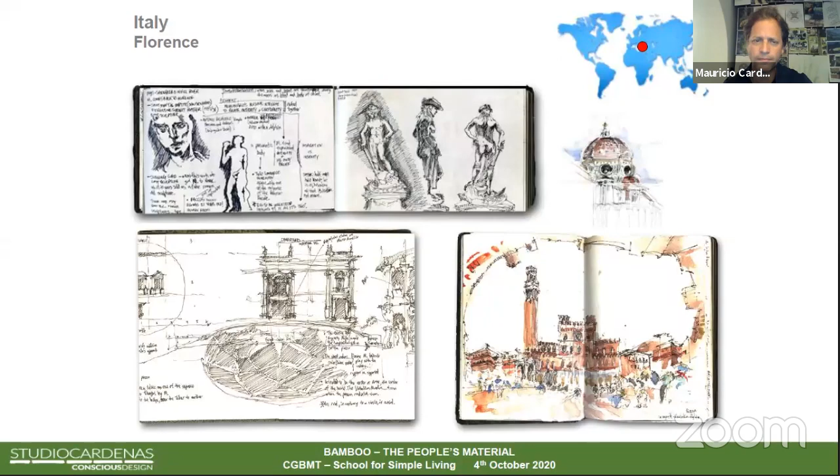Here we can see the study of the art of the Renaissance of Italy. During my studies, the geometry and aesthetics of Western culture, the origins of Western culture, also had a very strong impact. Then I came to Milan, which is the most pushing city in Italy, well known for fashion, design, and industries. And here is where I started my office.

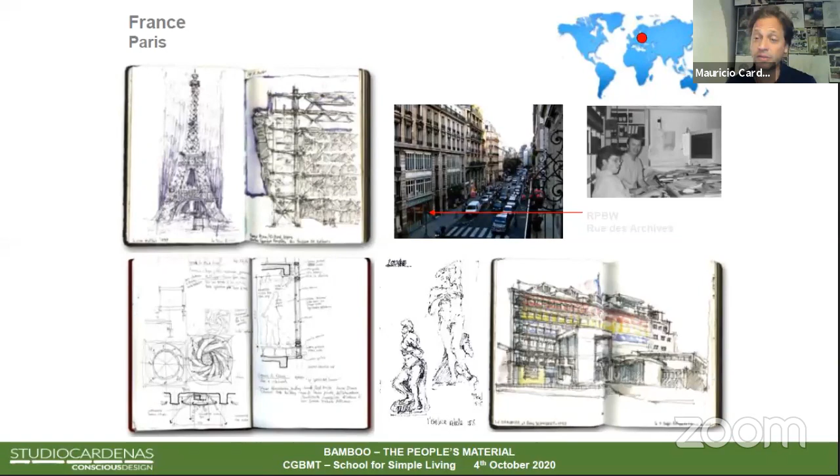But before that, I had the chance to work for an Italian architect, Renzo Piano, but in Paris. So I had the chance to have contact with a very important architect, and I understood very well the use of materials such as steel, glass, and building technologies that we see as very normal today, but that are having a very strong impact on the environment.

The massive use of concrete, steel, and glass are making our environment weaker day by day. So after these experiences, I was working in construction sites, doing management of construction sites and responsible for the design of facades of very big buildings like skyscrapers and office buildings, etc. I then came back to my origins.

I said, but we should go back to bamboo. I should go back to the origins of where I was born and where I lived, and to what I really believed in, and to the experiences from my opportunities of traveling both to Japan and China. And so I started my office, 15 years ago.

Since the first day, I was already working with bamboo. As you probably know, bamboo is a strategic natural resource, contributing directly to at least 6 of the Sustainable Development Goals adopted by the United Nations member states for the 2030 Agenda for Sustainable Development. And bamboo for construction - why is it important?

I call it a positive infesting because bamboo is a plant, not a tree, and it grows very fast - so fast that people usually get scared to have bamboo, as it passes from your garden to the neighbor's garden in a very short time. But this is a quality, not a defect. We just have to take care and understand how the plant grows, and can be cut, dried, and used.

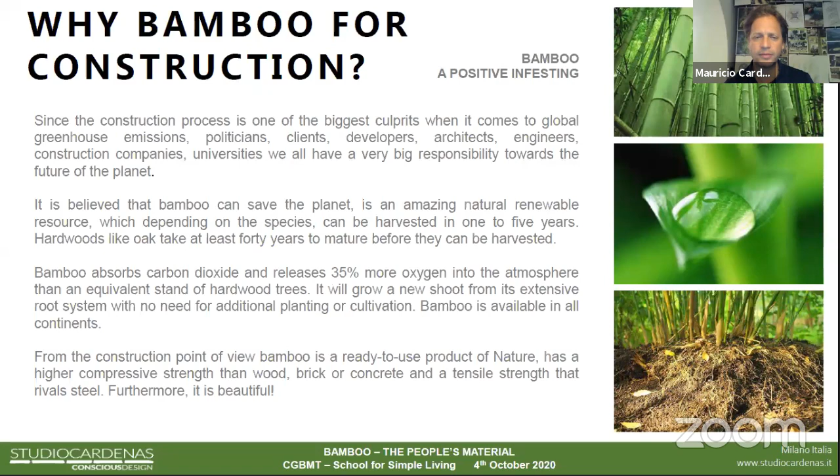When technology achieves sustainable engineered bamboo, I can start looking at that. But at the moment, I have actually refused some jobs because of that, because I really believe in what I'm saying.

So this is my office here in Milan, and we experiment, we do research - it's part of our job. Since the beginning, due to the use of bamboo, I've been recognized here in Italy and Europe as a pioneer of the use of bamboo.

The Italian government gave me the Italy Innovators Award for innovation in construction using bamboo. And last year, in the UK, I got the Build Architecture Award, as a sustainable company in Europe.

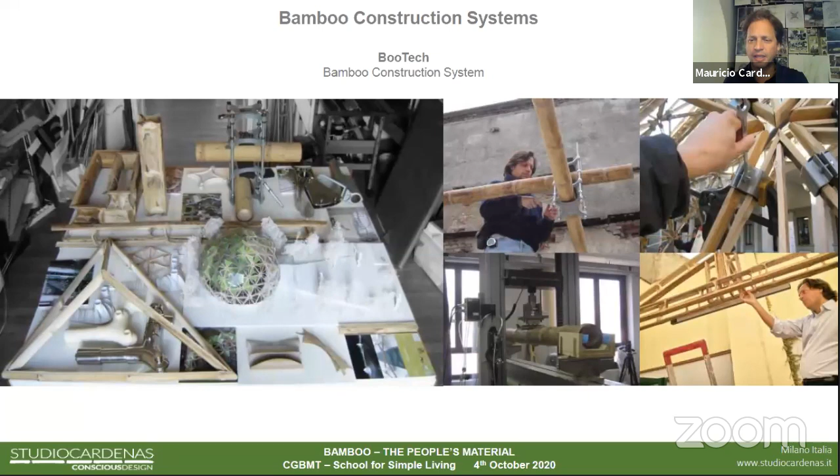Working with bamboo is very interesting, not only as the people's material, but also from an architecture point of view. Usually architects, in the offices I work as an architect and in other offices I know, work behind a computer screen, designing with software, and choose materials by looking at projects in magazines or catalogs. But bamboo is different. Bamboo makes us architects stand up, go out of the office, go to the forest and check out the material, because it's information we don't have in a catalog or that companies are selling. It's a natural material. It just grows freely, and its qualities are found directly in the forest.

Without even noticing, I became a bamboo culture communicator, in the sense that I'm invited as a jury member, or for teaching or giving lectures, as we're doing now. Last year and this year I'm Italian Design Ambassador, and I'm communicating bamboo. I'm the only Italian architect communicating about bamboo.

I've also had the chance to write articles about bamboo in Italy since 2005. The first article about bamboo as a construction material written in Italy was, of course, written by me, for the most important construction magazine in Italy, and it even became the front page. I wrote the first bamboo construction manual in Italian, and was invited to write the preface of a book written in seven languages about bamboo architecture and design. And in China, invited by INBAR, I wrote an article about bamboo.

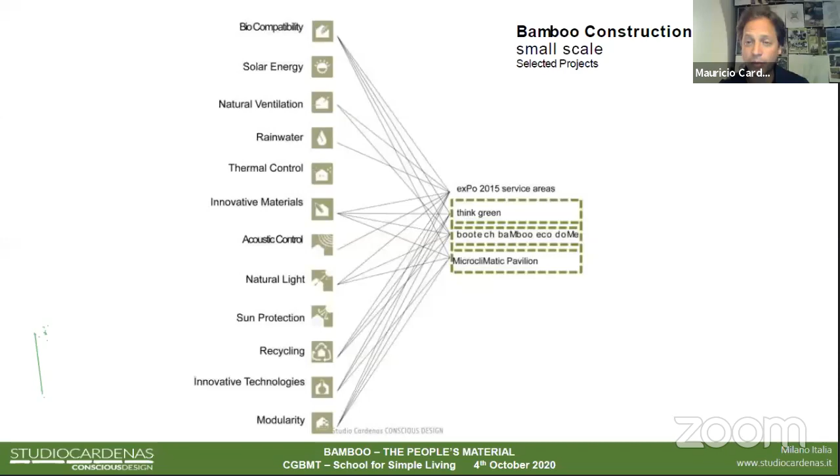So now let's go to the projects, and I'll try to go quite fast so I don't surpass the time we have. I'll start with small scale bamboo constructions. I chose some of them - I didn't include all of them, of course - and I decided to show only built ones, to understand the reality of the potential of using bamboo. Coming from Colombia, I always admired, and still admire - he's my friend nowadays - Simon Velez, architect.

Pioneers used mortar inside the bamboo, perforating it to include metallic bolts in order to make connections. That's how bamboo is built all over the world. But for that you need specialized manpower, which we don't have in Italy, or it's very expensive. So having experience in the facade industry, working for Renzo Piano and as leader of Arup's facade engineering, I decided to design a system that can be used and built by any company in Europe and around the world.

This is the system for which the Italian government gave me a prize. It's very simple, it works just by pressure. And this was the first structure.

I brought bamboo from Colombia, the maximum quality in the pictures. I worked with two of the top bamboo experts in Colombia, Marcelo Villegas and Germán. I showed them the project and my idea, and they liked it so much that they gave me the bamboo as a gift, shipping 100 bamboo poles because they thought the direction I was pushing was very interesting. That was my first project.

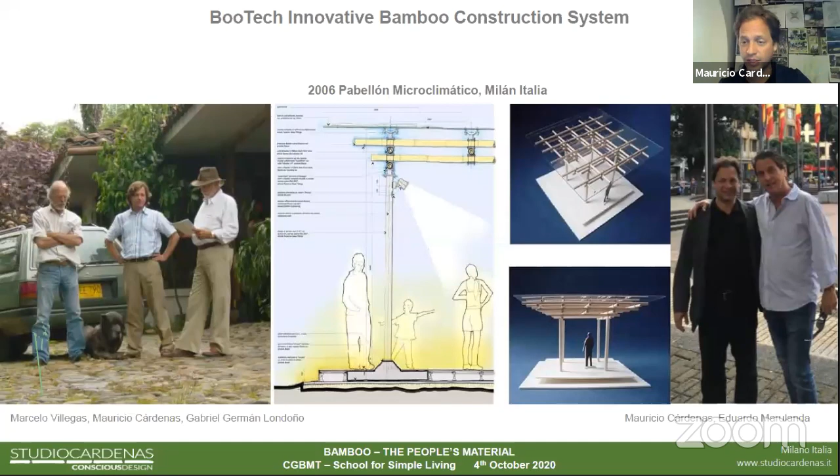It was with no client. The client was myself, just talking with these people and they gave me support. The students and people working in my office at the time were the builders. We all got away from our computers and got our hands dirty. We cleaned the bamboo, prepared all the joints and steel work, and we constructed it. And this is the result.

It was very well accepted in Italy, Milan especially being keen on contemporary design and fashion, and this was embraced as contemporary architecture. We're talking about 15 years ago.

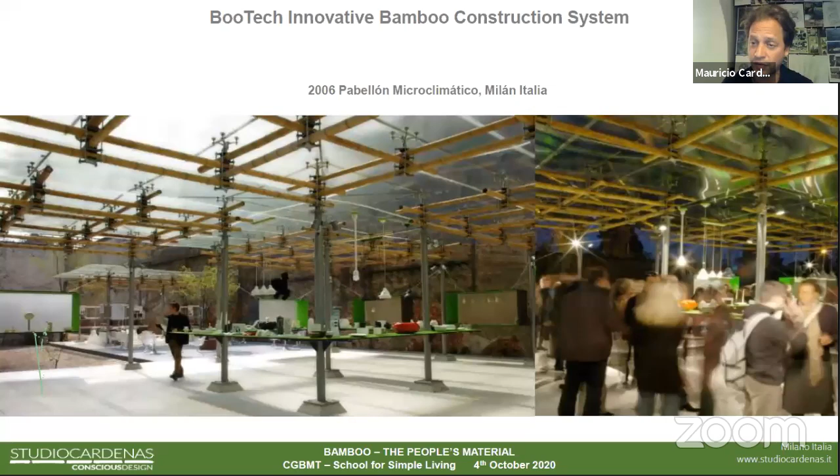This pavilion remained at the site for three and a half years. It was supposed to last just for Milano Design Week, a month at most. But the Milano city government asked me to leave it there for public use, and I was very happy for it. Three and a half years later, they told me they were going to refurbish and restore the whole area, so I had to take it away, and I did.

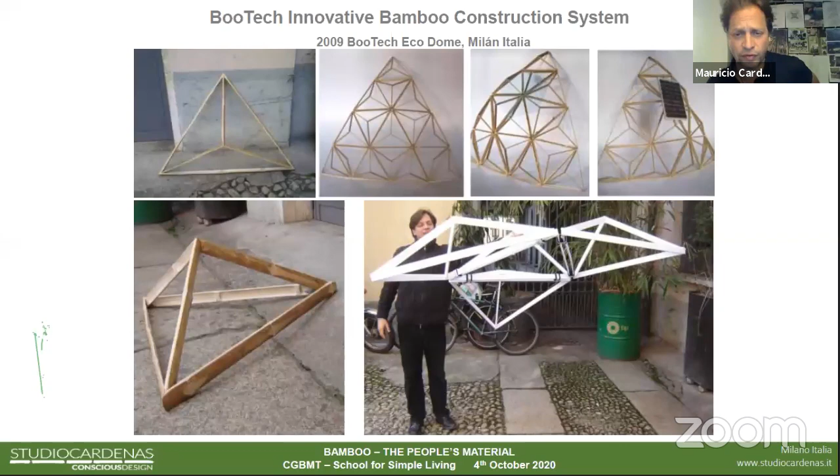I used the bamboo in a different way, cutting the poles to make this geodesic cupola. These are the ideas for the joints, and these are the models we did in the office to understand the complexity of this amazing and beautiful geometry. The geometry is amazing - you can see in the picture I'm just holding some cardboard pyramids, and the geometry itself behaves very well from a structural point of view. Then when we put bamboo in, it becomes a hundred times better. That's how we did it.

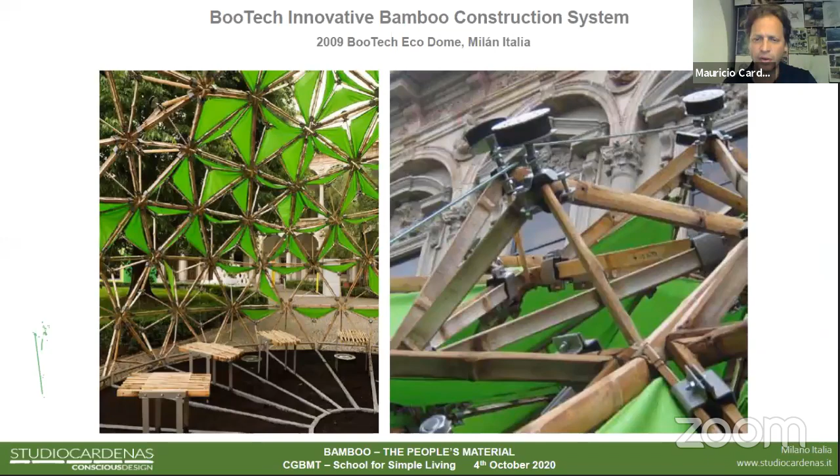We could even put the joints not at the intersection, but move them 20 centimeters away, and it still worked great. All of these are experiments, contemporary architecture, but also experimenting. It was placed inside a Renaissance courtyard, so the geometry follows the Renaissance geometries, and geodesic is a golden ratio in 3D. It's very interesting, the connection between both.

Then we dismounted it and took it to Venice, to the Venice Biennale. It was there for the whole Biennale. We're talking about 2009, 2010 now.

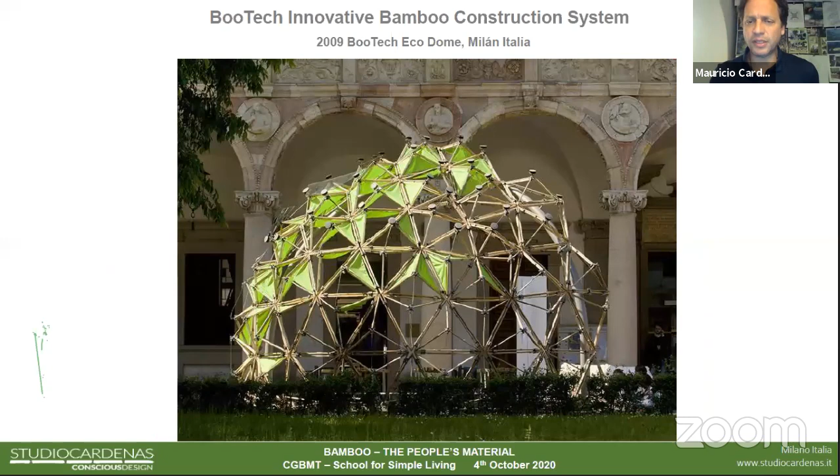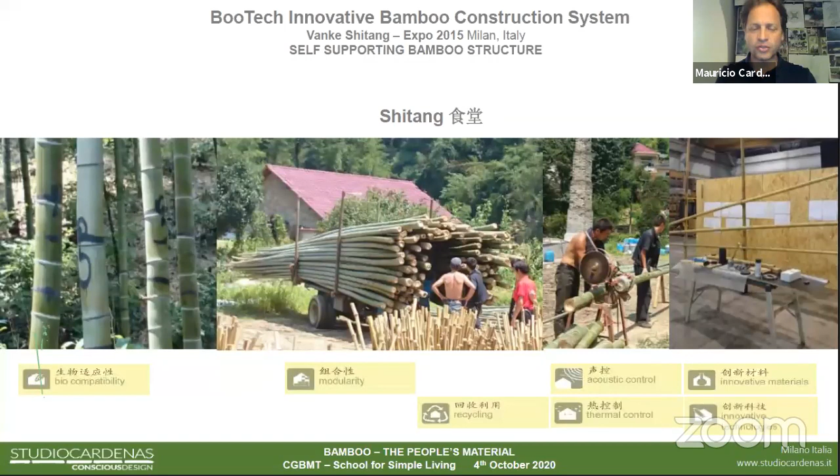Anyway, I went to China. The client was very eager to use Chinese bamboo, so I went to Anji, where the big bamboo forests are, and I was choosing the bamboo, controlling and checking its quality before bringing it to Italy. This was also important because bringing bamboo to Italy, especially for Expo, had very high standard requirements.

And then we did the prototype. These are the connections - it's the only bearing structure of the Expo, because some pavilions, like the Vietnam pavilion, could not pass the Expo's tests and had to use metallic structures covered with bamboo.

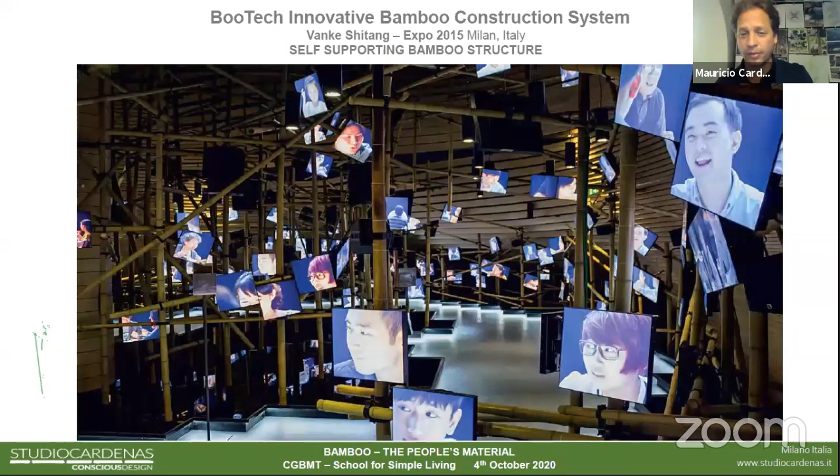In this case, it's purely bamboo, round pole bamboo structure, and people walk through. So it was very interesting and a great achievement.

The next two projects are in China, medium-sized projects. We were invited, 10 architects who work with bamboo, to do this experimental neighborhood in Baoxi, in Zhejiang province. My pronunciation must be very bad, but anyways, that's the name of the place.

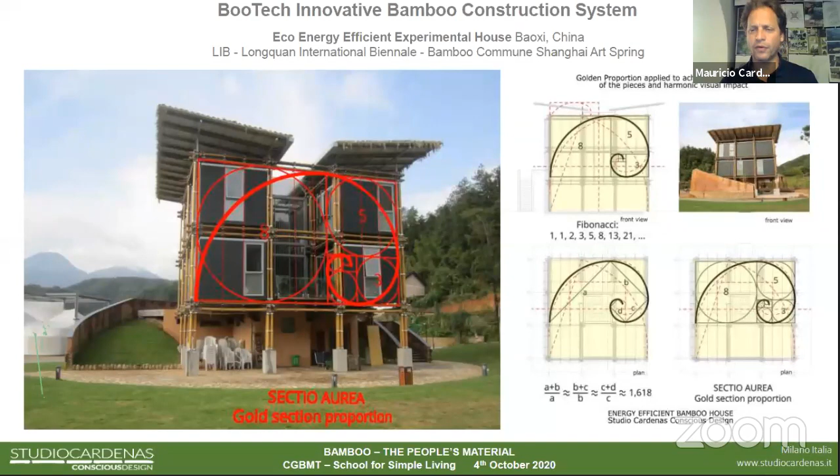The proportions are also what we call aurea, or golden proportions, but they're nicely connected to the Vastu Shastra in India as well. So, probably these geometries have a similar origin in the past and just developed in different ways. The ancients understood very well the potential of geometry, not only for beauty but also for engineering behavior.

You can see this is the idea of bamboo as a contemporary material. It doesn't have to be expensive. It just has to be contemporary and hopefully futuristic.

This comes back to what I was telling you, that I was very impressed when I saw Chinese and Japanese constructions made for the emperors with natural material, constructions that last until today, more than 600, 800 years old. Some of them replace the material, the same as we do with our cars today, the same as we do with our phones and with our technology today. We change the parts.

In Europe we make buildings that will last for hundreds of years, but using natural material means we have to change the material, and it will not be natural anymore. So for keeping the natural material truly natural while using it in a contemporary way, my approach is to use it as if it were a technological device. So in this house, every time you need to replace an element, you can just replace it because it's dry mounted.

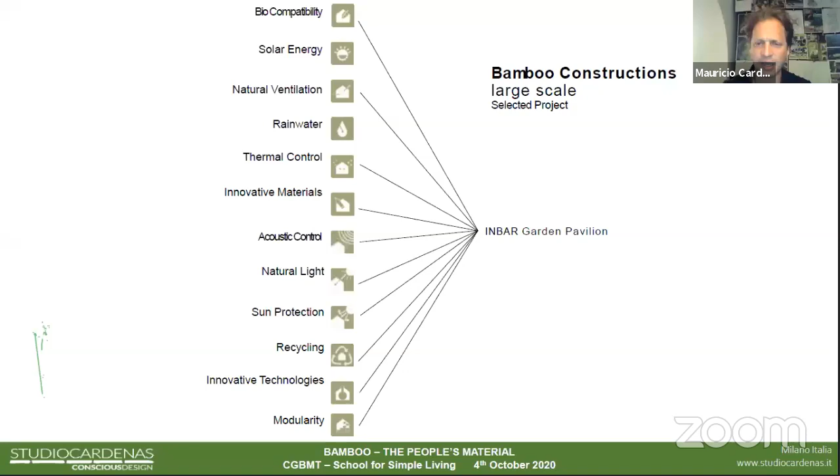Now the last project, and I'll go fast since I think we're close to the end of the 20 minutes, is the Inbar Garden Pavilion, International Organization for Bamboo and Rattan, as I hope everybody knows about it. It's based in Beijing, and Liu Wei will talk about it in detail. It's the largest bamboo structure in northern China, a 32-meter span, as you can see.

In all of the projects I've been showing, I haven't gone into detail about the conscious design, but you can see it at the bottom: acoustic control, thermal control, recycling, modularity. All of these elements are part of the design of this contemporary bamboo architecture.

The concept comes from the idea of not doing the classical pavilion and garden separately, but making the garden and the pavilion become one. So it's landscape, engineering, and architecture fused into one.

I got inspired by this Argentinian-Italian artist who innovated art by, instead of painting on the canvas, cutting it. By cutting it, he made such a beautiful and strong statement. So I did cuts on the garden, to bring in natural light, and used earth to do acoustic control, and used the plants.

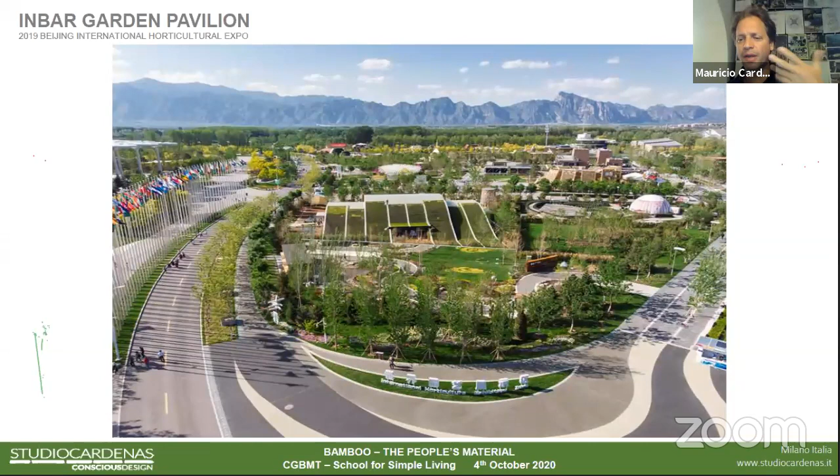You can see the other pavilions in the expo are pavilions on the soil, on the garden. This pavilion was recovered with the same soil that we took away for building it, giving back to earth what we had taken from it and using it for planting.

This is the concept. I don't know, sometimes you get some yellow lines, some drawings on top. I don't know if it's me doing it or what's happening, but anyways, it looks nice.

You can see here, from the concept to the construction: the inspiration, the models, the rendering, and the construction.

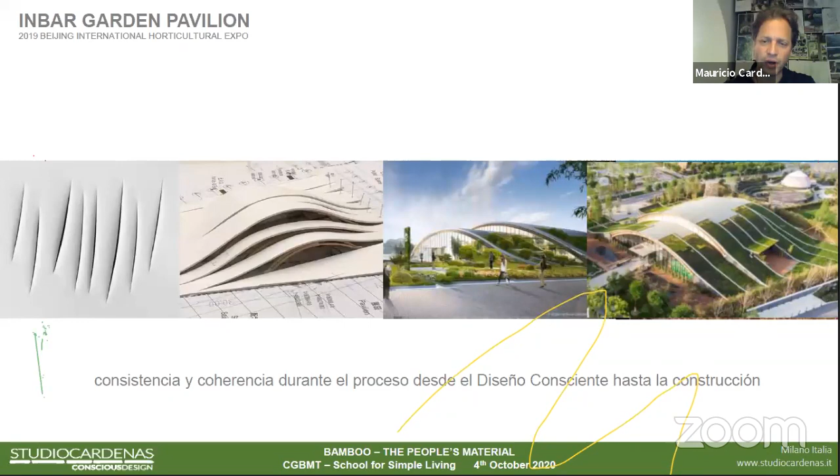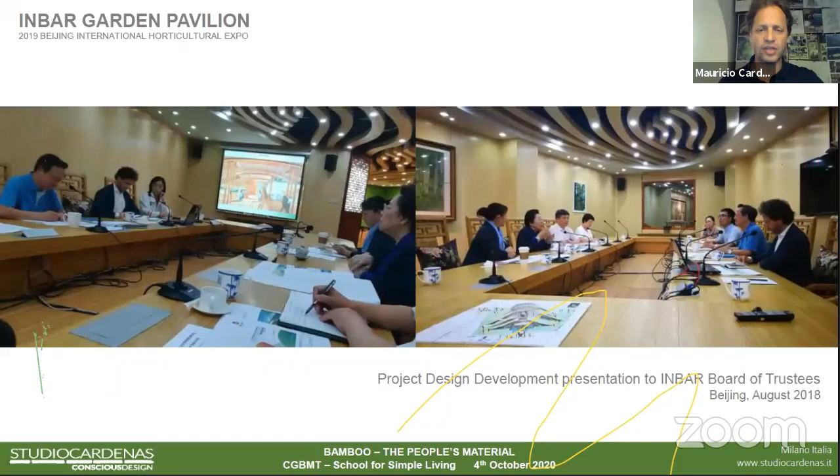Sketches, my sketches for studying the project, modeling, and the model I brought to Beijing, and it's now still in Beijing, used for meetings to explain the idea behind it and receive comments and suggestions. Bringing it also to the construction site was very useful to understand what we were going to do.

Choosing the plants was a collaboration between an Italian expert in botanics and a Chinese gardener, and we chose the plants for the garden. So the garden is a bamboo garden, and the building is a bamboo construction.

It was also called the geometry, you can see the geometry is based on this — the original curve of the arches is based on this geometry and the Fibonacci sequence geometry. It's very interesting because this was the maximum bend we could do to the bamboo. It's a mystery, whether it was a coincidence or the geometry has a real response from nature.

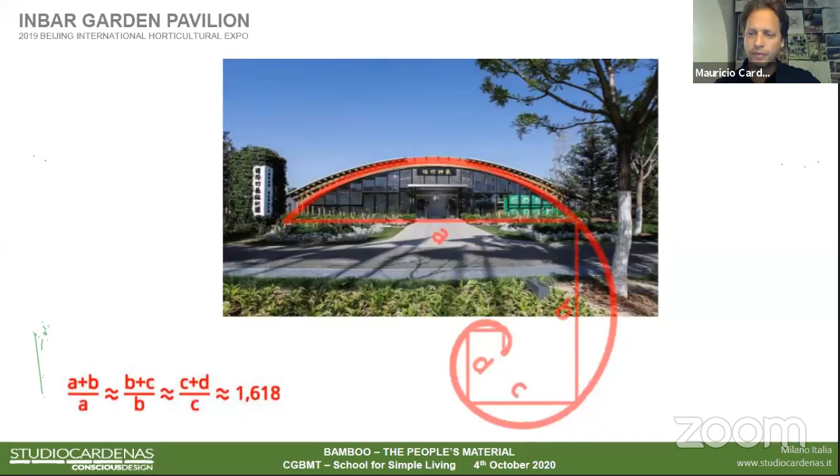I made a mistake and left the information here in Spanish, but I will read it for you in English. The Inbar Garden Pavilion has 54 meters of span and 40 meters of depth. Each arch has 32 meters span and 9 meters of height.

Dividing the arches into sections and opening them at the base made the structure look very essential and light. We used more than 5,000 bamboo poles, Phyllostachys pubescens, a Chinese original species.

The diameters range from 8 to 10 centimeters, and the age is from 4 to 6 years old. The principal arches are curved by heating the bamboo poles, and the process of transforming the bamboo into yellow was also done through the fire process, which was analyzed to give the bamboo a 30-year lifespan.

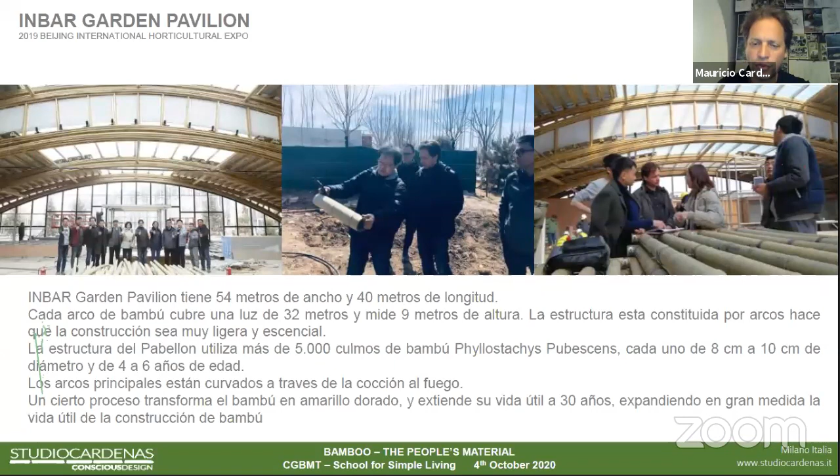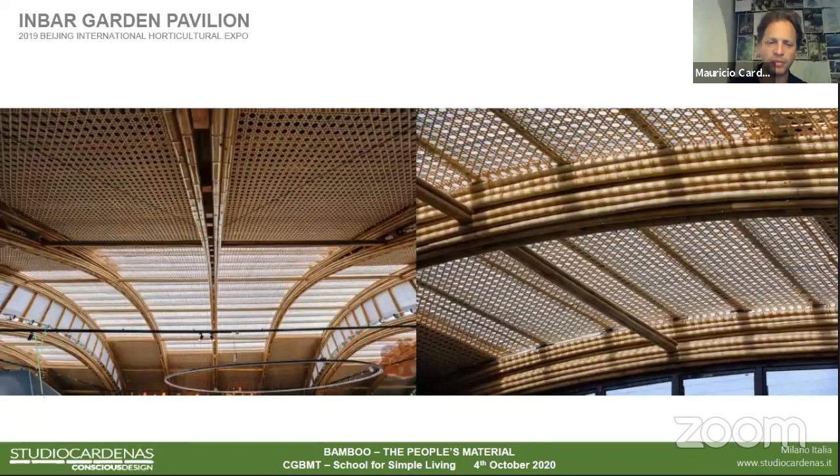Here are some aerial pictures, interior pictures of the bamboo structure. The exhibitions were amazing, six months of great exhibitions. You can see the connection between the glass facade and the bamboo structure, as contemporary as possible.

Because of the reflection of the water, the public named the pavilion the Bamboo Eye Pavilion, and I really like that image — that name is very nice. You can also see the green roof.

The opening day was a world event, an international event, and during the expo Inbar organized amazing meetings and cultural exchange events. The pavilion received the grand award in the category of international outdoor garden, in recognition of innovative and ecological design and execution.

What I was telling you — next year we'll have the largest bamboo maze in the world, the Labyrinth. In October we're going to do an event called Under the Bamboo Tree, and I'll keep you updated on that. I'm doing a small but very interesting research structure to present there, and there will be some lectures and conferences that I will let you all know about.

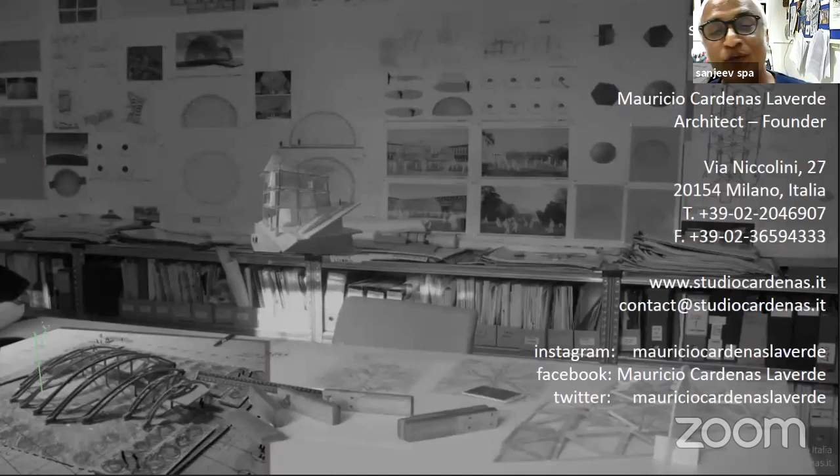Thank you, Mauricio. Thank you. This was a wonderful presentation, and it addressed the misconception that bamboo as a material is only for the poor — but with design elements it can be contemporized. It's a wonderful presentation. I would now request Neelam for her presentation.

Neelam, I know Neelam from the past 35 years, and she has been working in bamboo. Her firm, Manasaram Architects, has done wonderful projects in bamboo. Neelam, I would like to ask you how your journey started — you've been using bamboo for a long time, how easy or difficult it is to execute bamboo-based buildings, and its acceptance among people. Could you also tell us about your engagement with various kinds of people — students, professionals, policymakers, and communities? Your CGBMT is also running some courses on bamboo appreciation technology.

People would like to know the pedagogical approach for young professionals who want to use bamboo as a material. And what do you think about bamboo as a material of the future in the construction industry? So how can bamboo be brought into mainstream communities? Because bamboo as a material is coming to urban communities through various means, and architects are using bamboo. But how can the same architects and designers take bamboo in a much more revised and refined way with design elements, keeping in mind the cultural significance of the structures to the communities? I think this will be very helpful for our listeners.

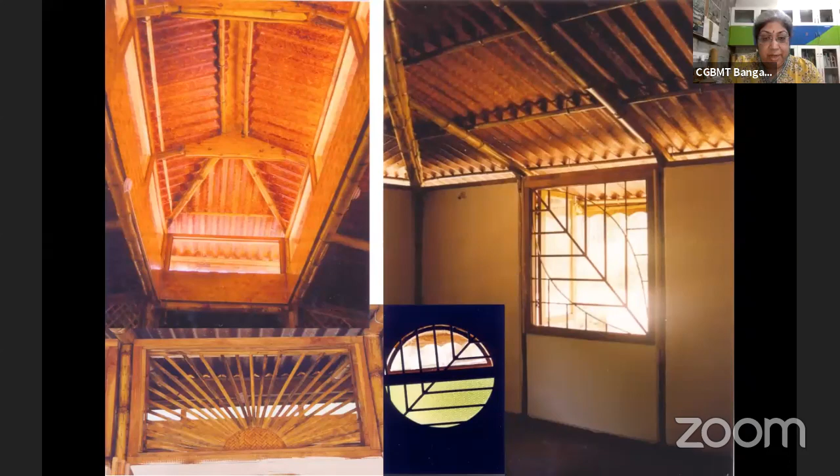This 2-bedroom house was presented in such a way that people should associate themselves with it, that even in urban areas we can build houses of this type and actually live in them. This is the interior of the house, finished in 2002. Most of the training programs for early architects and builders actually happened under this project, which was part of TRADA, DFID, BMTPC, Rajiv Gandhi Rural Housing Corporation, and the Plywood Institute. This is what came out of that particular project.

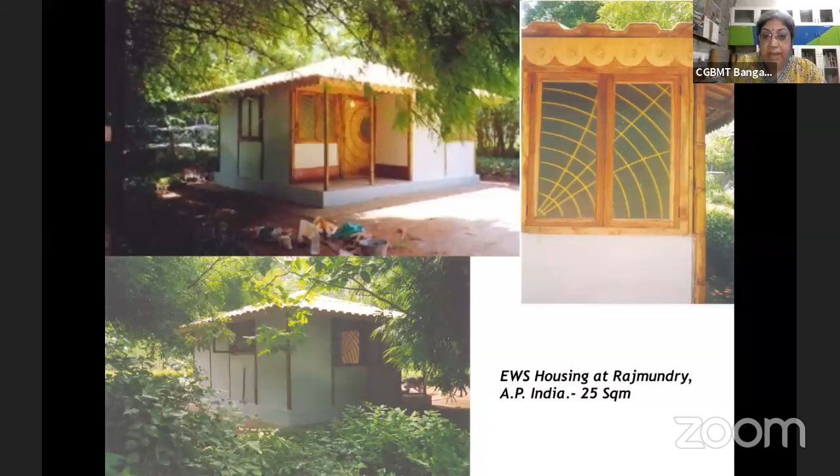This is another project we did, a very small housing project in a village in the forest, for housing for the poor - EWS, economically weaker section housing. This was an example we put up, as they had asked us to show the villagers how to build with bamboo again. This was also around 2005.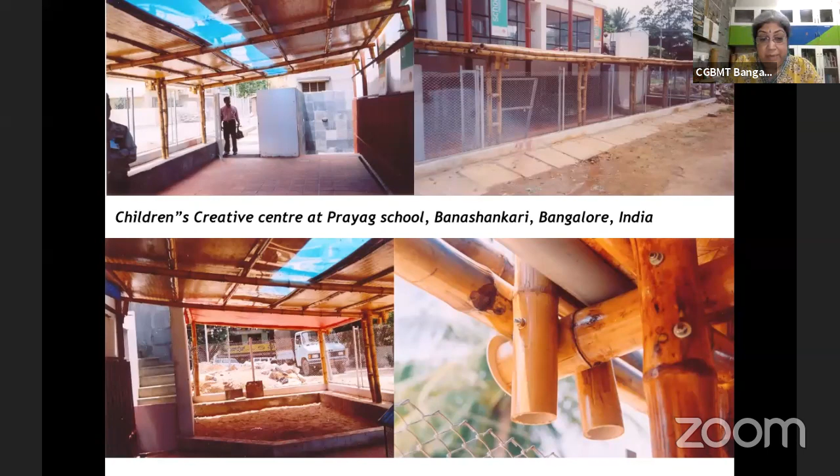And on the other side, this was bamboo, which I was working with, where I had these materials which I was experimenting with. So this is the same client, Prashant Prakash. These are in Bangalore, which is called the Discovery Village, and this was in 2007. We did a lot of furniture also for them, about 15 sets of furniture.

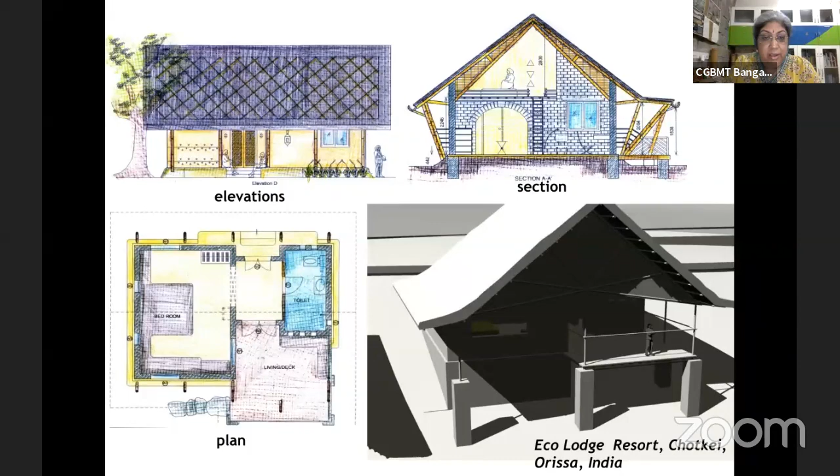This is a project which again Bansal sir had given me in Orissa, but somehow we could not go for the construction of this, which I have not got photographs of. There are several projects like that, because the budgets always used to be so small that they could not afford the other part of the expenses. So I have been giving them designs, but I have not got construction done.

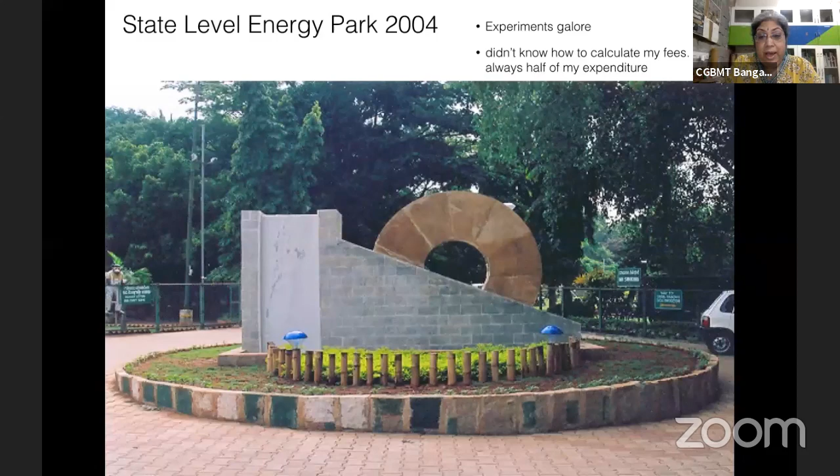We were given, I was an architect for the state level energy park, and I said bamboo is the lowest low-energy material, why not use it as much as possible? So there was a lot of debris, and I had stone and bamboo, so I experimented with as many types of construction systems as I could, which I have been trying to show.

This was one thing I always had in mind, that whenever I went to a client and tried to tell them to use bamboo, they would say 'can you show me where it has been done?' And I would not have many examples. So I thought I will keep changing my construction system to have as many systems as possible. So in every project, my construction systems actually change, except for some basic things—everything changes about how you actually take the load.

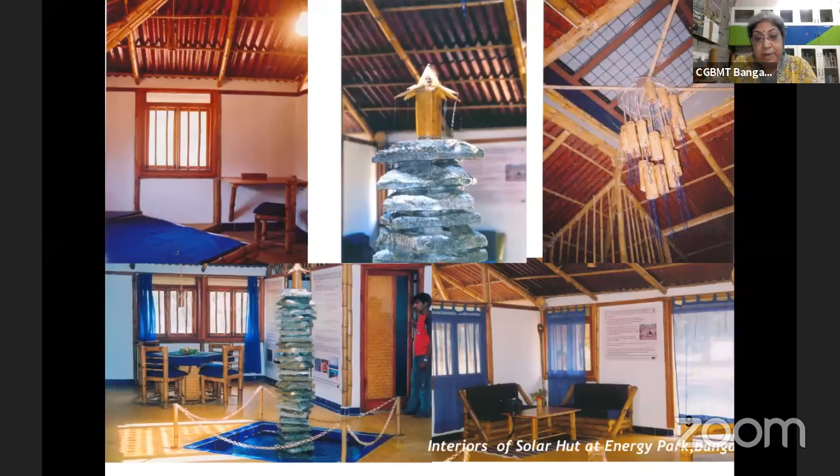And this is the interior with all the furniture in bamboo, as you can see, including the chandelier that is there—that is also in bamboo. I had 4 or 5 pavilions which I had to build, and I thought, okay, let me do all 4 or 5 differently, so that I can experiment with 5 types of systems. And that's how it kept on going.

Then this is another one in 2006, which is a bridge that we did for the Yamuna Biodiversity Park, and you can see the biodiversity condition—it is still there. This is 50 feet, 15 meters long, and we have hardly got any maintenance done for all these years. So this is a recent photograph put by Delhi Development Authority with the Biodiversity Foundation, which was on the cover of their magazine just about 1 year ago.

And these were the other gazebos, and the toilet block also we have done with bamboo and mud, and you can see the structure of the bridge from under. I use very less bamboo—that's another one of the things which I feel, because bamboo, I try to use as little bamboo as possible to take the maximum advantage out of it. So that has been my way of working with bamboo.

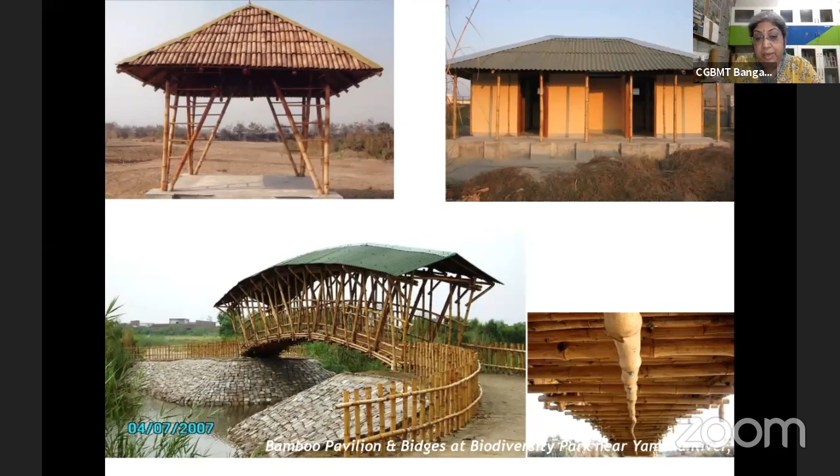So in 2006 we had one competition. I was not here, I was in Europe at that time, so I could not be part of the jury, and we were runners up in this. This was a shell that I designed at that time, a very large shell. The project got scrapped later, but this was something I was always looking for—structures like this with bamboo, as early as at that time.

And this, as you can see, these are all shell structures, designed very thin shells out of bamboo, and permanent structures, which I always have been talking about. We in India, in our part of the world, we are so poor, we actually always try to emphasize on using our resources very judiciously.

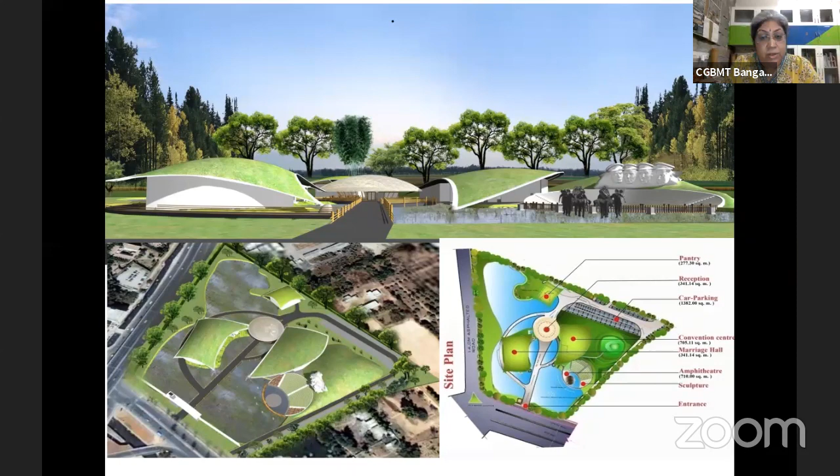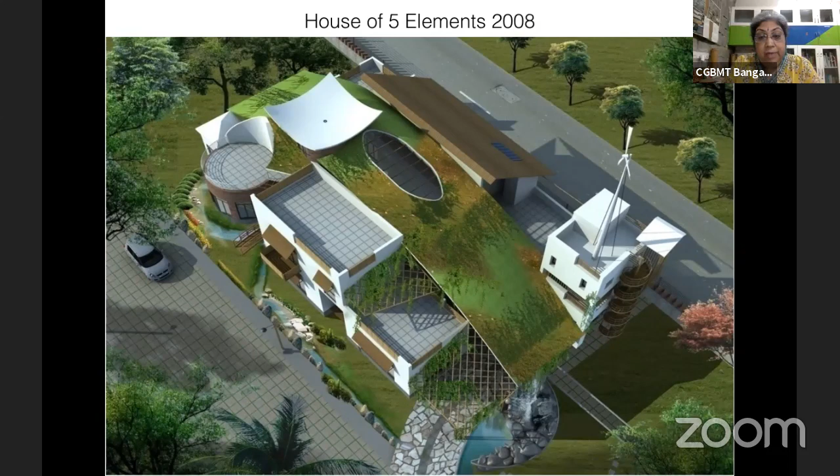So it's mud and it's bamboo. I went all over just to use mud with bamboo and stone, because these are 3 materials which you get actually almost everywhere, whether it's a city, a village, or a forest. So I was trying to work out a vocabulary of architecture with these 3 materials.

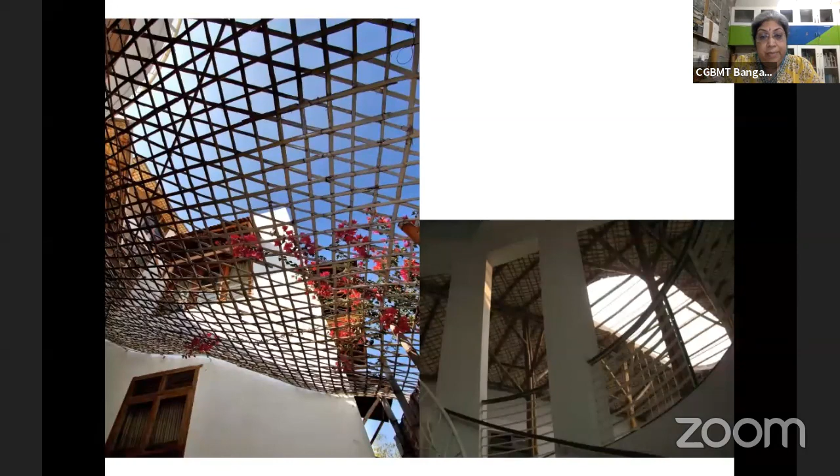So that's my house of 5 elements, with experiments, testing and checking. This is what I have done, not just with bamboo, also with mud and stone, always trying to cut across how to really go about it. These are not photoshopped, and as you can see, even for pergolas where people actually use steel, aluminum and other things, I have used bamboo. So it's about 40% mud, 40% bamboo, about 10% stone, and then we have some very little cement.

Actually, you can see that bridge there, very thin. So I always look at very light structures in my building. This is the roof with bamboo, this is bamboo flooring, and all those behind the bed, what you see, are bamboo walls actually. And all these bamboo walls are fireproof, so nothing happens to it.

So now what I'm showing you is a different phase with bamboo, where you can use bamboo for absolutely upmarket houses in a city in any manner that you really want to. There are some other photographs, and that's the roof I spoke about - it's about 30 feet wide and about 175 feet long. I have just 3 bamboos which actually take the load, most of them throughout the span. That is how we have actually used it.

So my house, and then immediately I did my office. In this case, I have a double curved shell roof over this structure, and then my office has a bamboo reinforced roof, which is again a free form shell. These are all mud - the ceiling is with mud, and many of the furnitures and things are with different forms of bamboo ply, whether it's a roof.

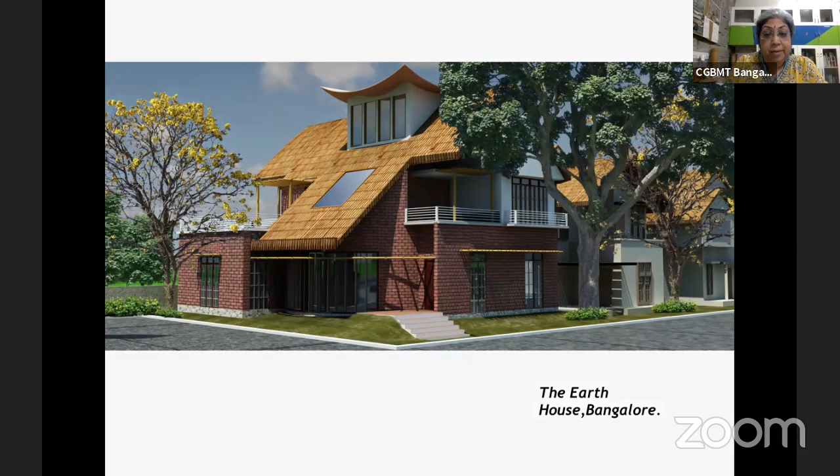The same time, this was another house that I did - I don't have the photograph of this. This is also built at the same time, around 2008, 2009. It's called the Earth House, and it's in the same campus. And then I somehow got the courage to do my office, Bamboo Symphony, which I call in 2010.

My principle was design, test, document, and keep on repeating it. I tried to get data from anywhere across the world, which I actually could not find - so maybe it was a boon in disguise. I did all my testing myself in a very simple manner because I could not get any structural engineer to actually verify what I really wanted to do.

So what you see here is my office built in 2010, and this is the entrance to the house. The stone arrangement that you see in front is called tsukubai - it's a very auspicious arrangement of stones from a Japanese garden. That's how you enter into the office, and that's the office in different levels. These are all debris stones, which were from the highway construction.

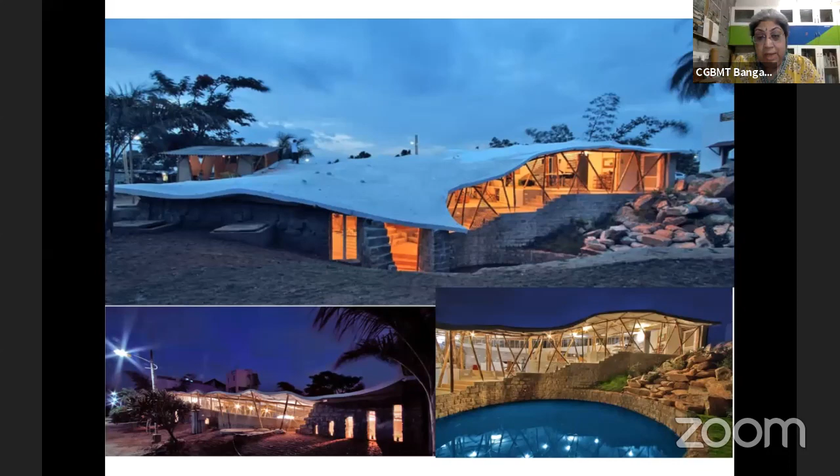This is a free flowing roof, and you can see those slim columns. They are single bamboo columns taking a load of 4-inch slab, which is reinforced with bamboo, and it has got bamboo fibers to take care of the bonding between the bamboo splits and the cement. That was something we took as an aspect ratio, and we put it inside the cement to put it down. This is how you see the whole office from the other side.

In tropical countries, we can afford to have these kind of offices. This is completely oriented to the elements. So till date, it is open like this. I have no proper doors or windows or anything. It's completely open towards the inside.

The temperature control and thermal control has been achieved through the designing, orientation, the heights, and controlling the windows of the total building. For this itself, I got the Aga Khan Award and Lafarge Innovation Award, and around 10 to 12 awards for this particular project.

This has been written about. My projects have been written about in over 25 countries, in around 20 languages. Most of the works that have been...

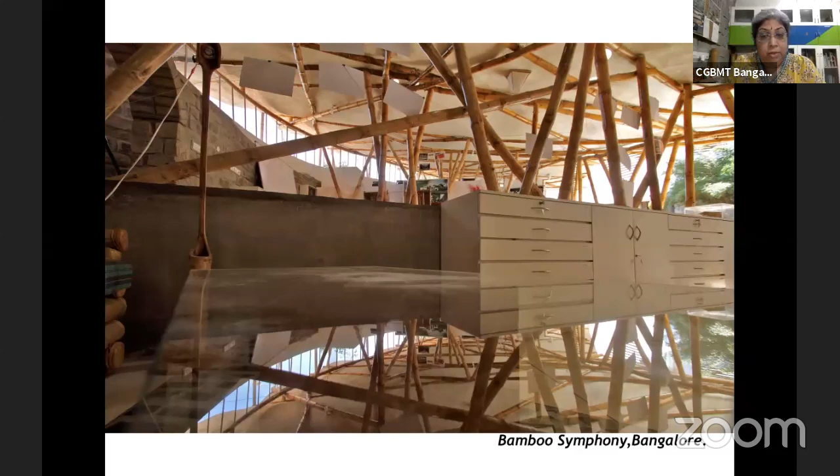This is the inside, as you can see, it looks like a jungle, a bamboo jungle, but all these inclinations that you see are structurally relevant. That's not interior design at all. This is all structurally relevant. And these are more photographs.

Then we had these other projects which we were developing, in the same language, bamboo and mud and stone. This is a house in the outskirts of Bangalore, again with the same 3 materials.

This was a project which we somehow got from the government of Gujarat, and again I designed a shell, and they were not very happy with the shell, and it is under process with the government. I really wanted to show this because I have many unbuilt projects in my kitty. The bigger projects are more in the kitty right now.

And this is a metro station. It's very interesting, I did it in 2013. This is again a shell structure, a very long one, and we also had the concourse at the bottom.

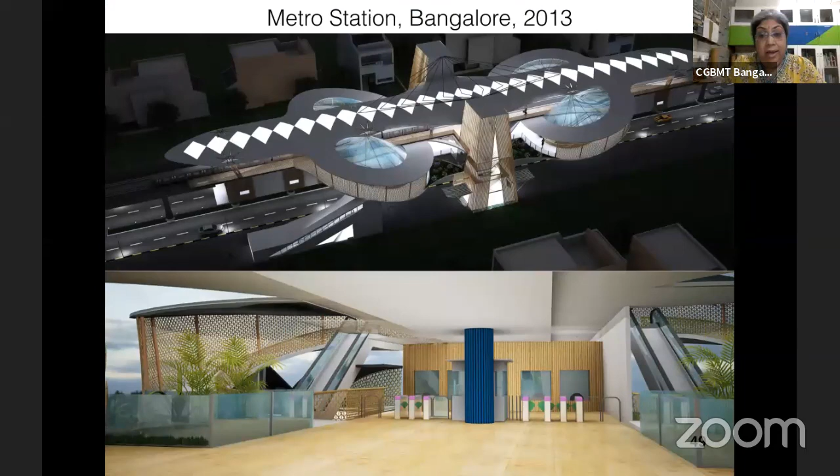Just to tell you, India, Bangalore is going to have the second international airport in the world with a lot of bamboo in it. But my metro station project is still pending with the government, where they want the fire auditing. The architects of the Bangalore International Airport for the bamboo thing is SOM.

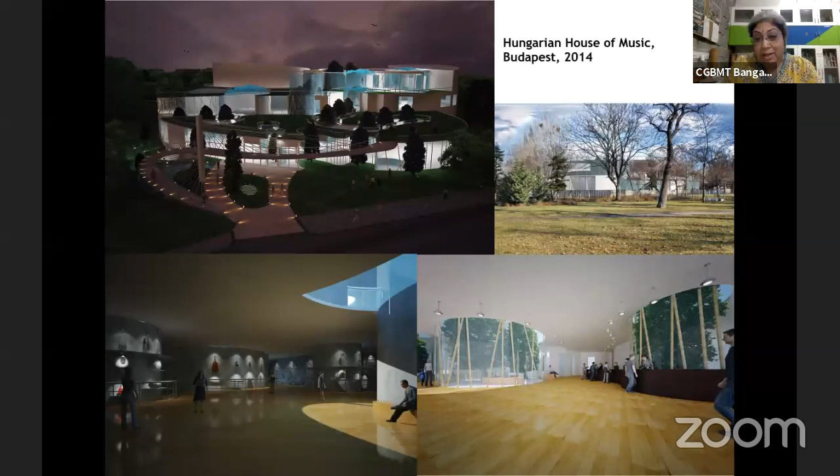As an Indian architect from Bangalore, I'm still waiting for the government's audit for my designs, while we have the second international airport in Bangalore with a lot of bamboo in it. So that's a little bit of data I just wanted to share.

This is in Hungary, and no, we did not get the project. This was a competition, and we get very thin bamboo there in Europe. Accordingly, I designed it, and this was a museum of music. I designed it in that way, with musical walls. I think I'll have to rush through.

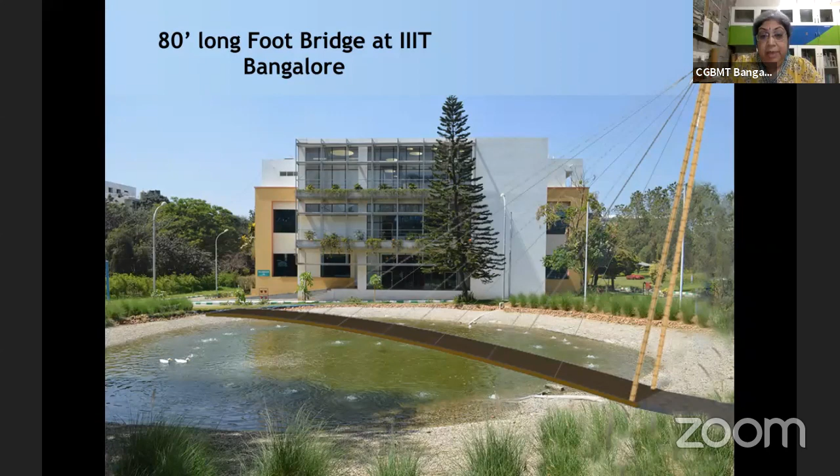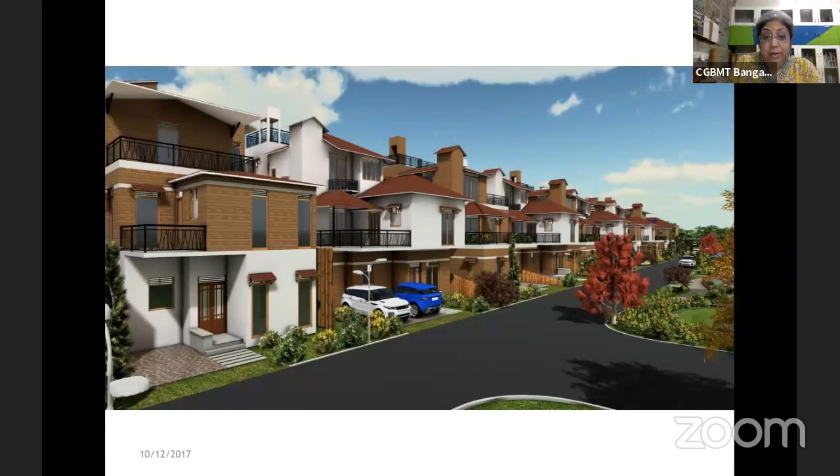I just wanted to show the variety of projects possible with bamboo, from small things like bus stops and folding toilets, to larger projects. This is a housing project in which I have used bamboo in several ways, in different kinds of things - as a ply, as a pergola, as a screen, as several kinds of roofing. There are so many ways you can use it, and it is possible to build.

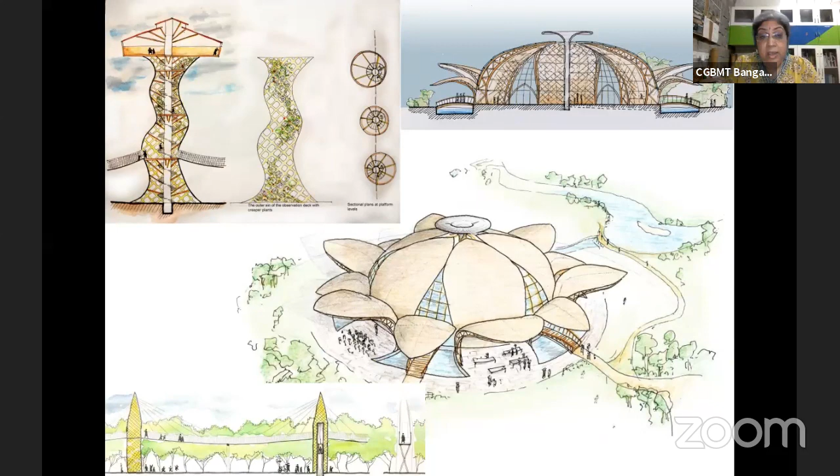This was another project, the Avilala Ecological Park in another state, Andhra Pradesh. Unfortunately, again, because of the Andhra Pradesh government after the election, this is slightly stalled. But this was the kind of structure that we had designed, and this is around 30,000 square feet.

This is the kind of structure, as you can see, for the inside. Here are the details. This is a project for meta-slum development for poor people who are given these concrete houses in cities like Dharavi, and how it can be changed so people who come from villages can feel comfortable even in a city, done with very simple materials and much lesser cost.

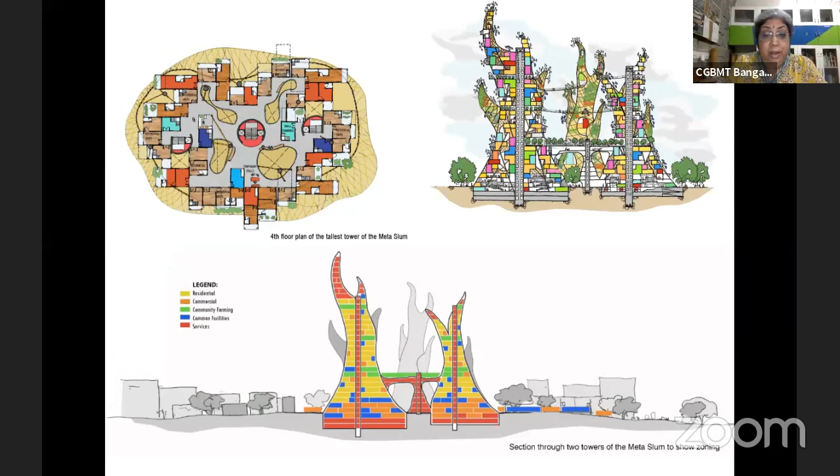So this was our project for a competition actually. These are the, you can say, very organic plans. And this is the main structure, the core structure, which is for the services, made with steel and concrete.

Other than that, there are many other structural systems which have been used. And this is how, when it spreads to different towers, you can have different towers like this, which can be done in a very simple manner.

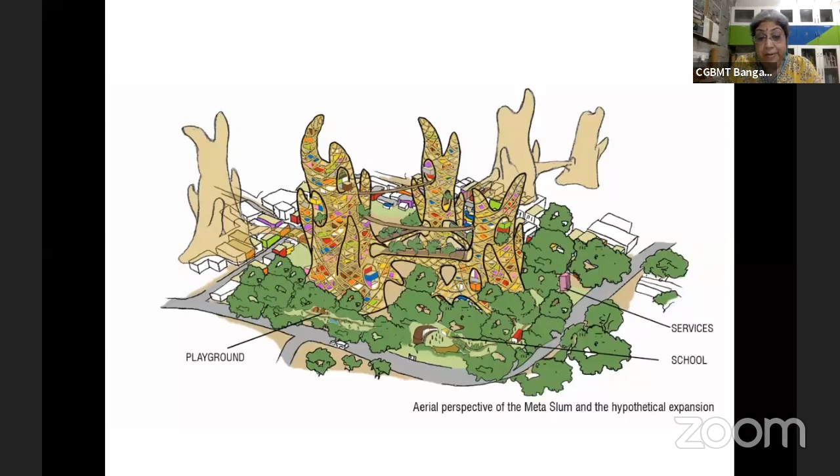This is another project where the craft is a crafts village, and this is again at the tender stage. We have done most of the drawings, but again the government and corona, thanks to them, we are just waiting. This is a very large one, done with rammed earth and a shell roof on bamboo, around 20,000 square feet of area.

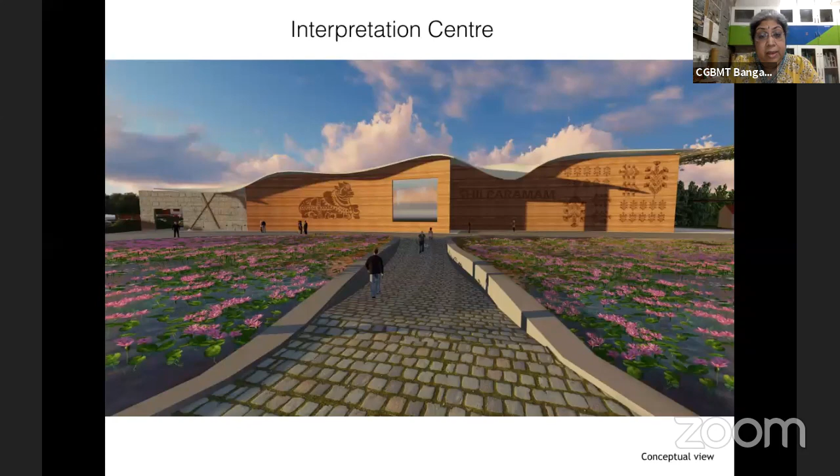This is a food court with bamboo pergola. This is the conference center of the hotel, and this was a 5-star resort in the same campus. And we have a 200 feet long bridge which is supposed to be done there, which we are designing.

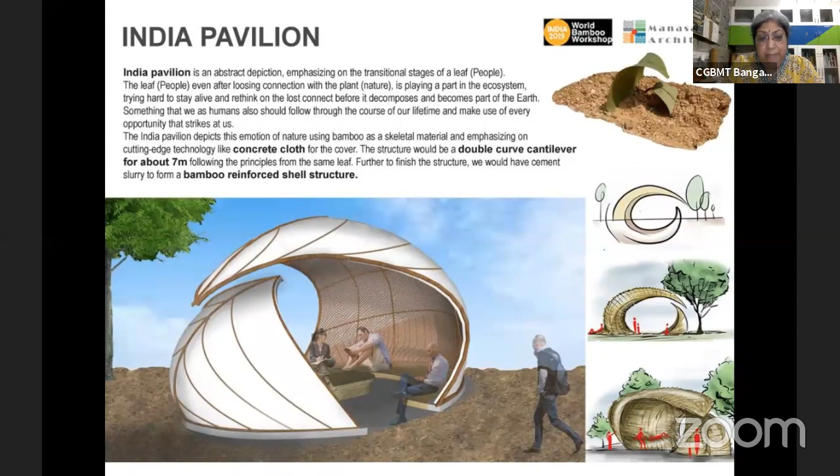This is something we did last year in the India Pavilion at the World Bamboo Workshop, 8 days of work starting from the bamboo, everything. This is a very simple solution for how you can actually cover curved space.

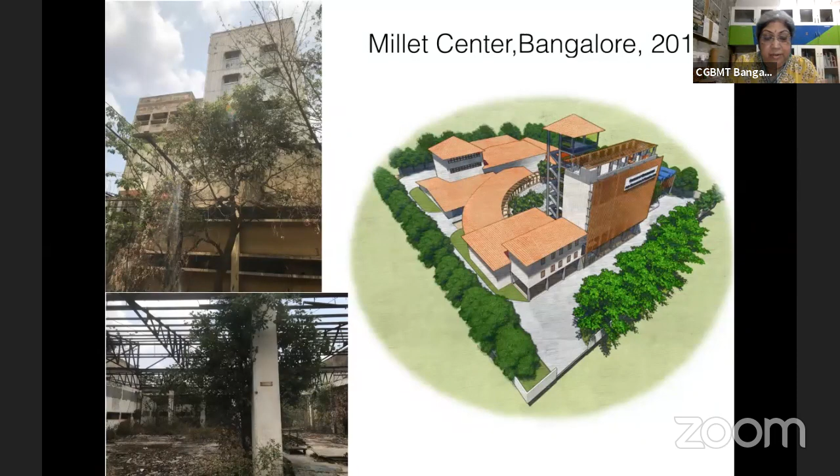And this is another millet center, which was a seed processing plant - this was the condition on the left. This is how it has been designed, and this is accepted by the government already. Again, this is at tender stage, and we are hoping to start construction very soon. And this is finished now.

This is a project we finished very recently for the Pegasus Institute of Excellence, and these are some visuals of that. And in the mainstreaming of bamboo, I think we can see these stalwarts - we have Jasim sir, we have Ramanuja Rao sir, and other dignitaries we have been trying to involve.

Then we participated in 2016 in the Venice Biennale, and we did a global survey in 2018 and presented it at the World Bamboo Congress in Mexico. This is a global survey as to what are the problems actually in the bamboo sector. All these things are available on the internet.

The pedagogy that we started was with Dayalbagh Educational Institute, and that's the connection. This is our first structure, done as proof of concept, in 2006, and it is still there and being used by them.

Dayalbagh has been really promoting bamboo in a very big manner. These are various projects that we have done for Dayalbagh University in Amritsar. Again, in 18 days we finished this whole project, including all the furnishings and everything.

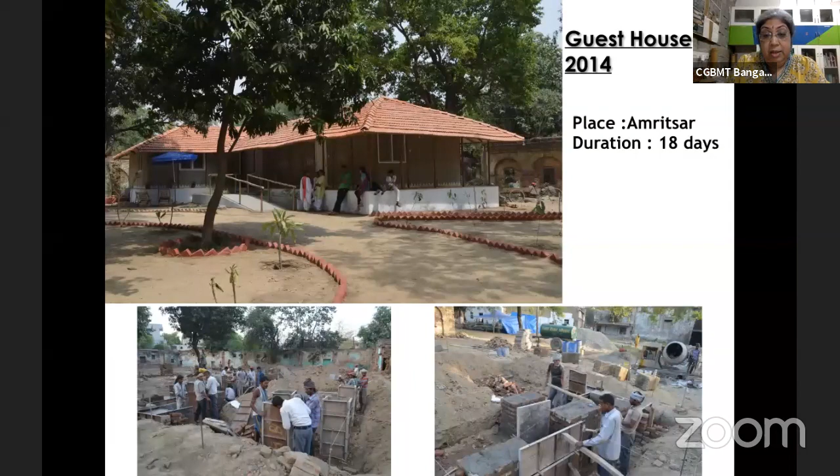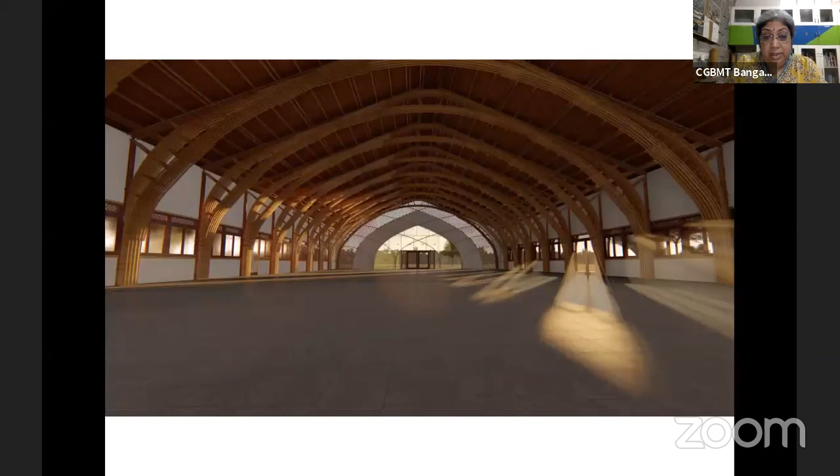This is a project which is under construction - this is a conference hall. There are two halls in Dayalbagh, the DEI, Dayalbagh Educational Institute, and this is the second one. Right now, both of them are under construction.

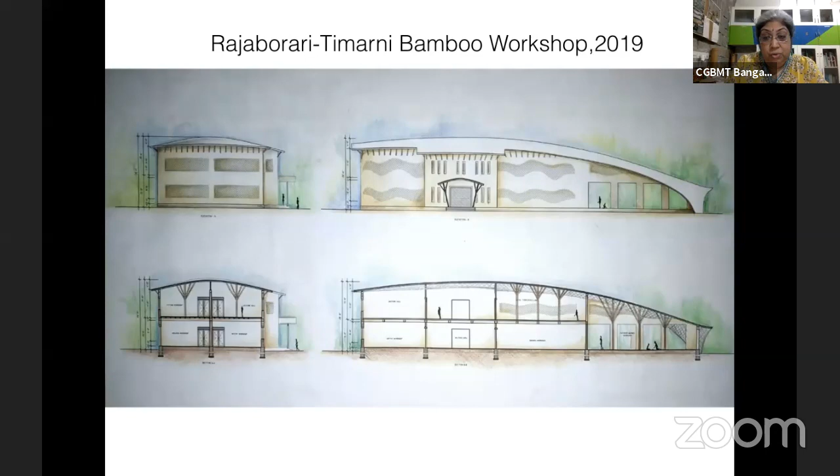We are summing up. I have miles to go before I sleep. As a summing up, I will show one last project, in Maihar, which is the Pedagogy for Architecture for Simple Living, an education that encourages changes in knowledge, skills, values, and attitudes to enable a more sustainable and just society for all.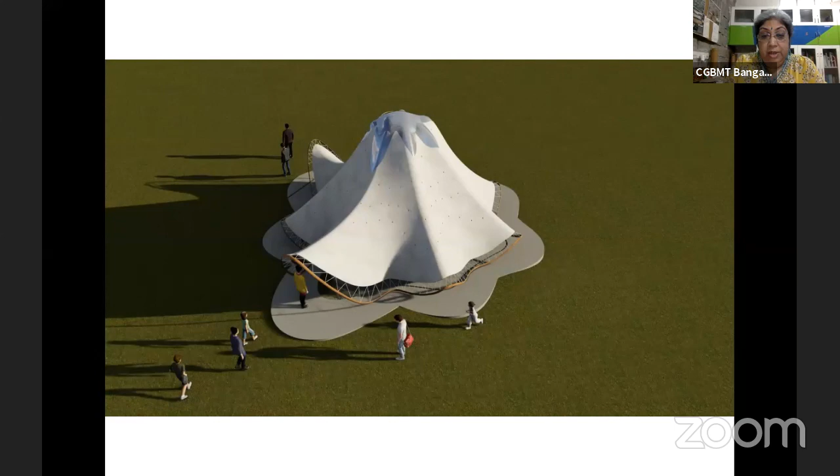And this was a project. This is the 3D model, and this is how we did it. This is a mud and bamboo shell that we are actually doing. This is the kind of local art that we try to introduce in this, done by the local people. It's a very traditional art system, as you can see here.

This is the pedagogy for the building industry, according to me, for simple living: collaboration. Here you can see, in the first photograph, an artisan reading a drawing—he has become capable of reading a drawing—and an architect learning from a simple person. Then you have all these people working as faculty, who were masons and other people at some point in time. The same project is now being visited by a Chinese delegation to really understand how things were done.

I'm ending this presentation today, right now here, and I'll quickly show you a very small one.

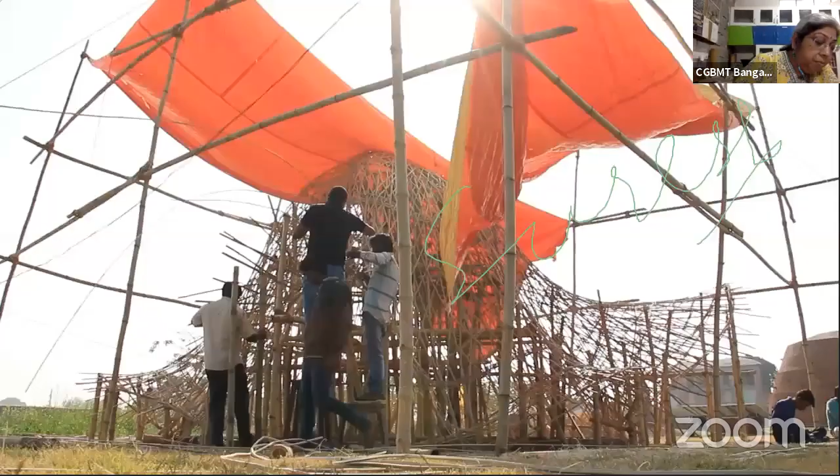As a building material, it would be very beneficial.

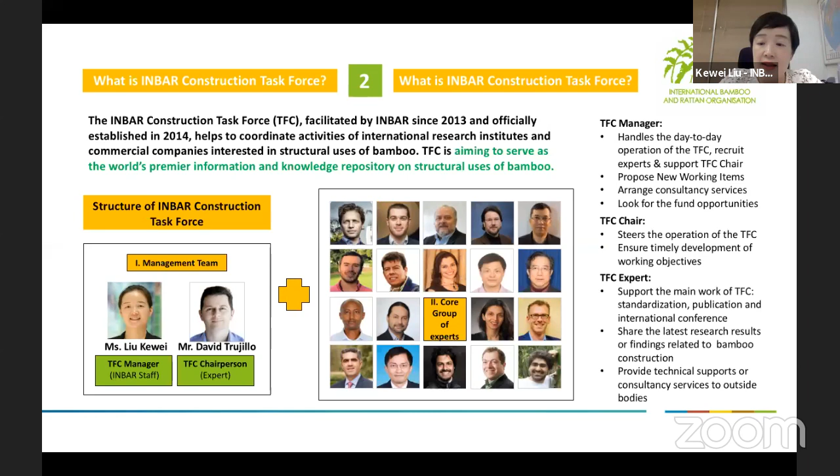Another important part of this group is we have a very big group of experts. Those experts support the main work of the task force. They contribute their efforts to standardization, publication, and international conferences related to bamboo construction. We also share the latest research results or findings related to bamboo construction, and we provide technical support or consultancy services to third parties.

Right now we have 28 experts from 18 countries. Some of them come from private sectors and companies, and some are professors from universities or research institutes. Most of them are architects and engineers.

You could take a look at the map of the distribution of our experts in this group. I think it's quite different from the map of our member countries of INBAR, because there are several countries like the USA, Canada, UK, Switzerland, Italy, Australia—all developed countries. So this means that not only bamboo resource countries located in the global south are interested in using bamboo as a construction material, but also developed countries pay lots of effort on it.

So I will introduce the main work of this group. The first one is standardization work—this is the most important work for this group. We also carry out international projects and produce high quality peer-reviewed publications, organize international conferences related to bamboo construction, and already have done lots of work promoting capacity building for bamboo construction professionals, as well as providing consultancy services.

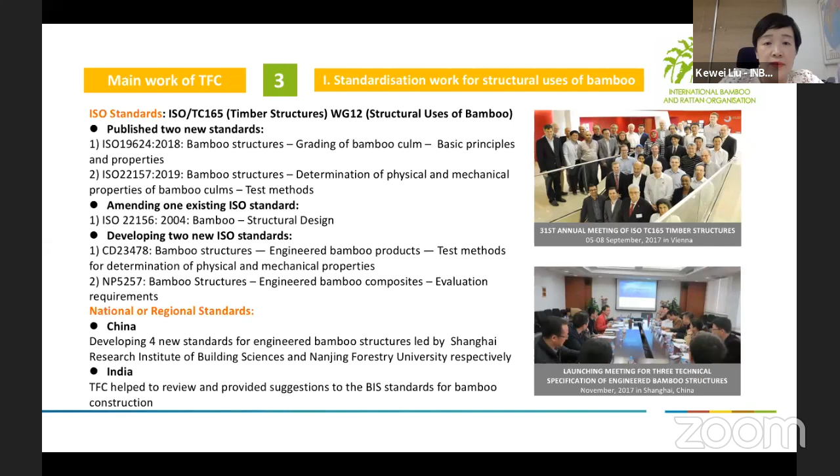The second area is we also implement international projects. From 2015, we have been implementing projects funded by the US Department of State and the British Council, led by the University of Pittsburgh and Coventry University, to bring together leading experts of bamboo research to carry out extensive analysis and testing to further enable the safe use of bamboo in urban centers.

And in 2016, we collaborated to support University College London to travel to China to identify suitable stakeholders, and had collaboration with China to use innovative beam technology on round pole bamboo.

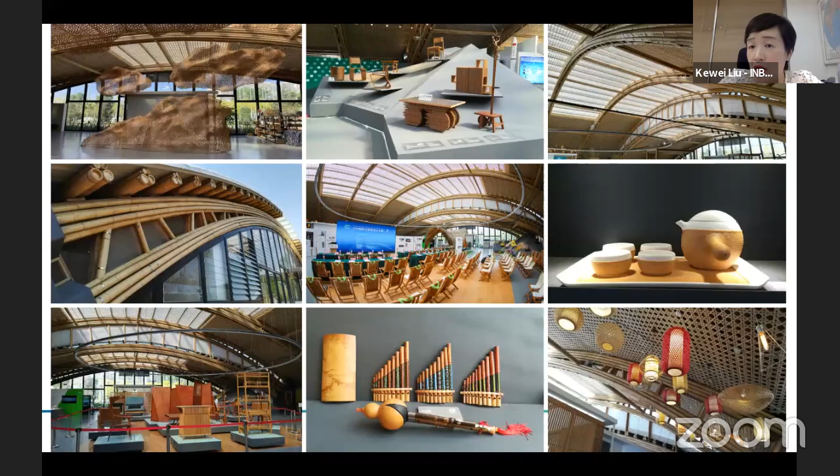The third part is we produce lots of high quality publications. There are 4 categories we produce. The first is INBAR technical reports. You can go to INBAR's website, click resources, and search bamboo construction. Those publications are all free for downloading. We also collaborate with international publishers to produce books or academic conference proceedings, and we convene different experts to produce articles in international journals.

The fourth one: in recent years, almost every year, INBAR organizes lots of international conferences, like Bamboo in the Urban Environment. We organized a series of international conferences in Canada, USA, and Indonesia, attracting lots of participants from many countries. Welcome to all participants in this webinar from India to attend our coming event.

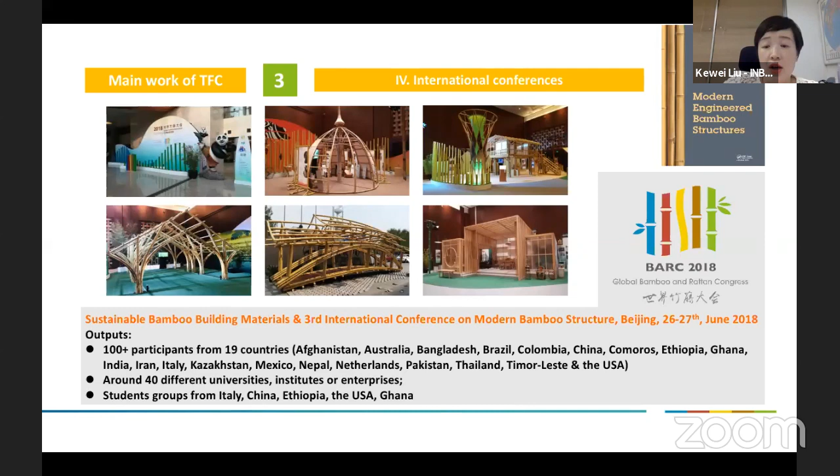This is the Global Bamboo and Rattan Congress we organized in 2018 in Beijing, where we showcased the latest innovative technologies of how to make round pole bamboo structures. We show some frames of that work. We also organized a 3rd international conference on modern bamboo structures, attracting participants from 19 countries, along with lots of students from different countries.

So the fifth one is we are trying to promote capacity building for bamboo construction professionals. Every year, supported by the Chinese government, we have several training programs. Since 2005, we've trained more than 1,400 trainees from 18 countries, including some participants from India. Some of them are policy makers, some are engineers or architects.

We also give lectures for craftsmen to teach them how to use bamboo as a construction material, and we provide customer-made trainings for professionals. Last year, I delivered one to 4 engineers from Bangladesh to join a trip in Anji, to help them improve the durability of round pole bamboos and teach them how to construct.

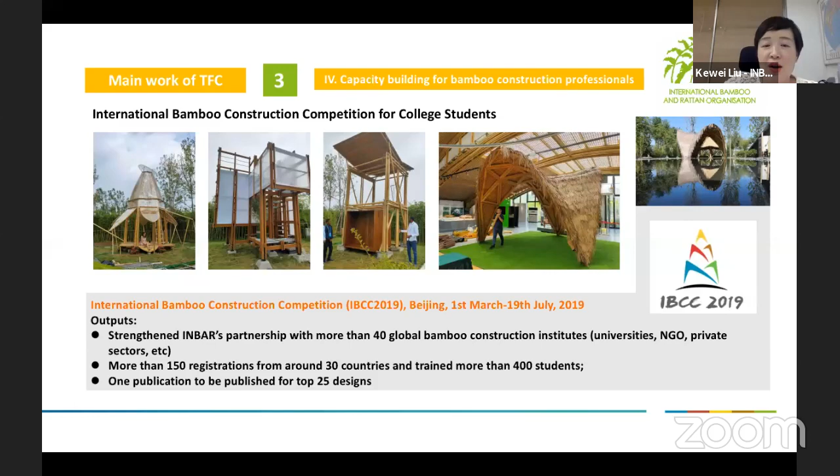Another part of the trainings I would like to highlight is the International Bamboo Construction Competition we organized last year. For example, last year we attracted 150 registrations from different teams in 30 countries and trained more than 400 students. In some universities, teachers organized students to use the competition as a short-term course, so we hope to continue organizing this to promote capacity building of college students. Unfortunately, last year we received only one submission from India, so we hope more students will join us in the future.

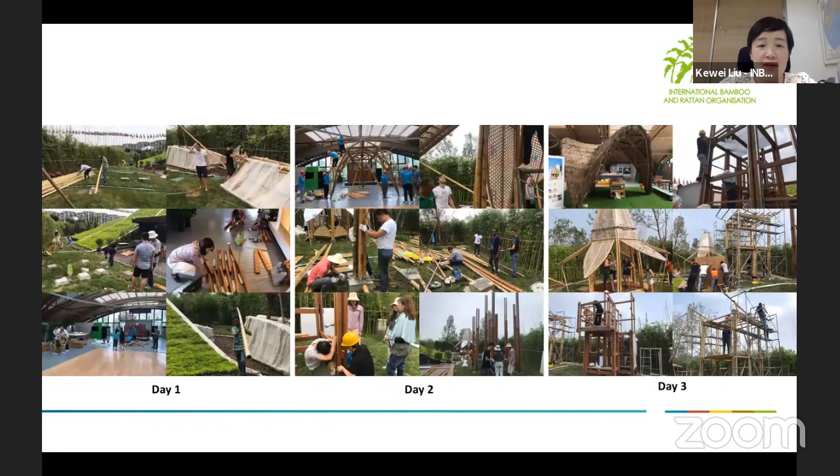I'll show some pictures. We are very impressed by those innovative designs. In the first row, the first one is designed by a team from Belgium, the second from Ethiopia, and the third from China. Different students with different backgrounds, but all very creative. They have 3 days, 24 hours, to construct a 3 meter by 3 meter small bamboo house in INBAR Garden, and they also deliver presentations.

Meanwhile, we also provide consultancy services. For example, in 2016, CRS commissioned INBAR to conduct a study on bamboo shelter in Odisha, India. We helped them carry out a field study to identify local species for shelter construction. So if in the future anyone needs help from INBAR, please contact me.

Back to the INBAR Construction Task Force: if any audience members are interested in becoming an expert of the INBAR Construction Task Force, you can contact me and provide your CV and endorsement letter, and we will review your application. We hope someone could join us in the future.

I would like to share some information: we will organize the 2020 International Conference on Bamboo Construction. It will be an online conference from 3rd November to 8th December. Every Tuesday, we will invite 3 experts to introduce their work on bamboo construction.